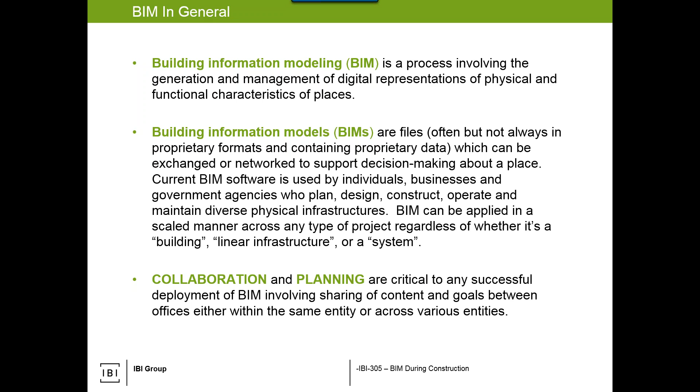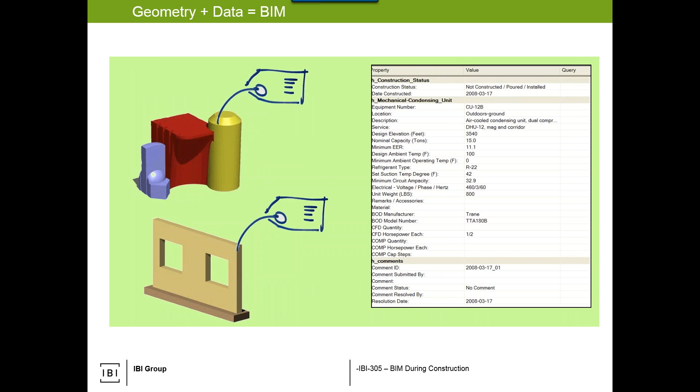BIM, as I said, is geometry plus data. An asset plus something about it gives you BIM, and that something could be robust and it could be simple, depending on what the purpose is for BIM.

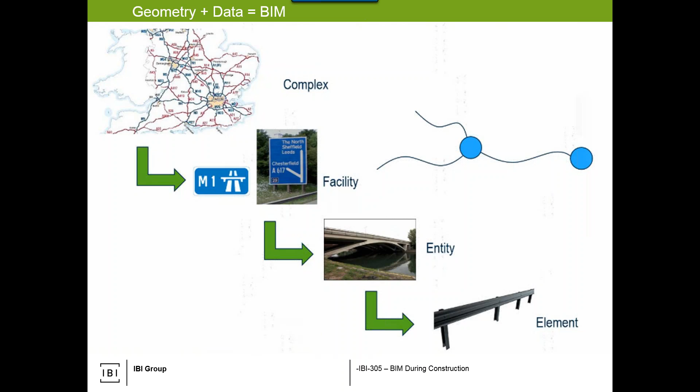BIM is about information, the I part of BIM. So you have an asset that's modeled in the virtual model; its identifier, shown here as an example of an equipment ID placed on the model, can tie it back to other sources of information — a schematic, a spec, an operations manual, a computerized operational screen. All of that ties to the very same singular asset, so it's connectivity of information.

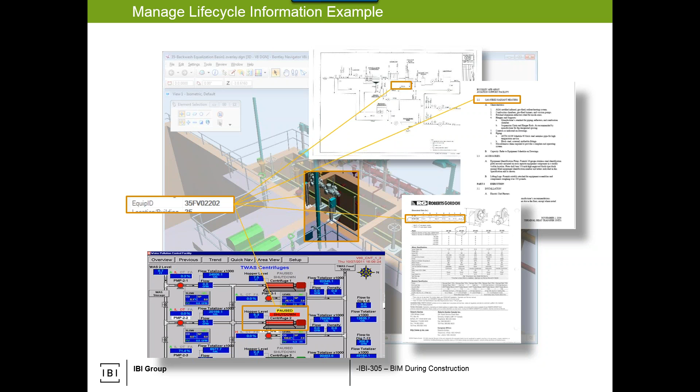Imagine everything around the side there wouldn't be jammed into the BIM model, but would be referenced to and linked to in various means so that that information is consistent and accessible.

Now here's where the fun comes in. Why do we BIM? So I think it was the second session we went around this wheel here and we touched upon each of these. The orange ones I describe as the base ones. When we say IBI does BIM for the most part on all projects, that's really what we're doing. Getting our drawings and schedules, conducting reviews, and visualizing our models.

And the visualization can spawn off into our specialty visualization with our entire extended team, global team in IBI, focusing just on visualization, rendering, and artistry. The grayish ones are your typical, when you go to BIM sessions, your clash detection, your estimating, etc. And the green ones are more advanced.

Now in the world of the contractor though, those where I've placed the star, that's where their focus is. So they're going to work in collaboration with a designer. So they're going to receive models, hopefully, of some nature, or they're going to receive PDFs and then model from their perspectives in order to achieve some or all of those BIM uses.

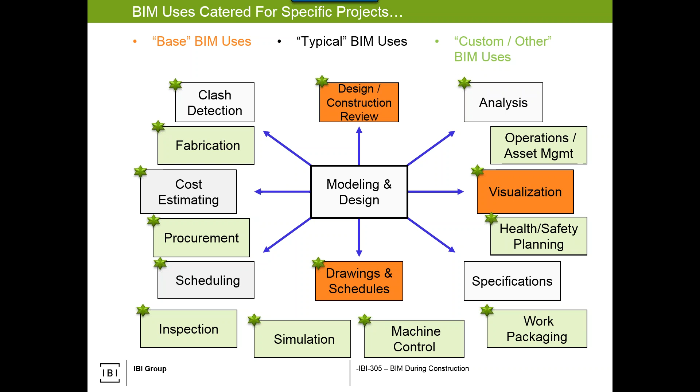And then in addition, they'll also be designing items, analyzing items, again conducting reviews, and doing health and safety planning for their sites. And we'll go through some of the stuff that gets designed in the contractor's realm as well. But before we go any further, I think I brought this slide up in the first session. BIM execution planning is very critical.

Two sessions from now, we're focusing on the project BIM lead, so that will be a point of accountability to ensure that the BIM portion of a project is scoped, scheduled, and budgeted. But that triangle at the bottom there is so inherently critical to understand that every entity, every division within an entity must have a scope, a predefined scope of why they're doing what they're doing, and it has to work in alignment with the schedule and the cost and the resources, etc. If any one of those vertices break, the triangle falls apart.

Quality is this element in the middle, and that's where the BIM portion is supposed to come in and infuse and enrich the project. But it all works together. I'm showing this because you need a plan. You've got to understand the BIM goals and which uses are going to be harnessed, and you have to mitigate scope creep, especially on the larger projects.

So for the 53% who answered no, they haven't worked with the contractors hand in hand. This is where on design build, P3 projects, or if you're on the design build, operate, finance, maintain, DBOFM, or any other type of arrangement, you're hand in hand with the contractor, sitting there as an architect or an engineer saying, this is how I design, and all of a sudden the scope and the requirements and the demands and the requests far outweigh, I would say, the normal path that a design project would take.

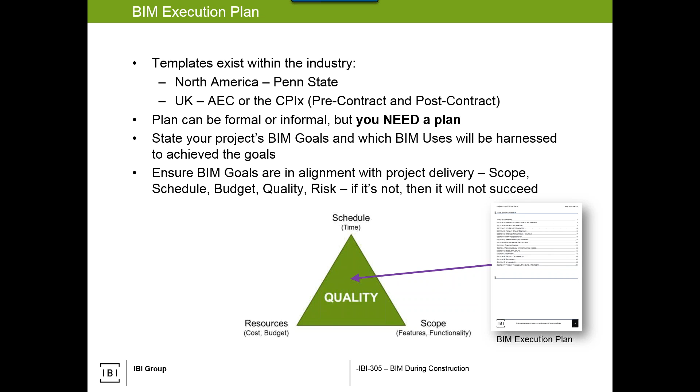So you just have to understand this. It's not to say that these relationships don't work, but there's a lot of hardship when there's scope creep throughout the entire process of design. And we'll go over a bit more of this now. So focusing on the contractor, the first thing you'll probably hear is VDC. So that's caused confusion in that, well, what does that actually mean, and why do we say that, and who is that? So VDC is Virtual Design and Construction.

You can Google it, Wiki it, there's pages on this. I like to say it's the contractor's term for BIM. So there's that perception, the BIM myth. BIM is for architects, BIM is Revit, BIM happens in design. Well, if that myth were true, we'd need a different term for what happens in construction. So that's, in my mind, how that formulated. At the end of the day, it's all BIM.

It's about information modeling. BIM is the overarching process that covers the life cycle of the project. BIM during design for architects and engineers, during construction for procurement, fabricating, and constructing, and during operations to manage the assets of importance on a project. That's where BIM plays its role.

There are many BIM terms in the world. I'll show them on the next slide in one second. But this VDC term, just equate it to, if we're teaming with a contractor, they will most likely have a virtual design and construction lead or coordinator.

And what we want them to do is give us a plan. What is the contractor's intent when it comes to BIM? And that's whether they receive BIM models from the designers, whether they're working to build the BIM models with designers, or whether they just receive nothing from the designers but intend to do BIM. We want them to outline their intent in the same manner as we would want to outline ours in the world of design.

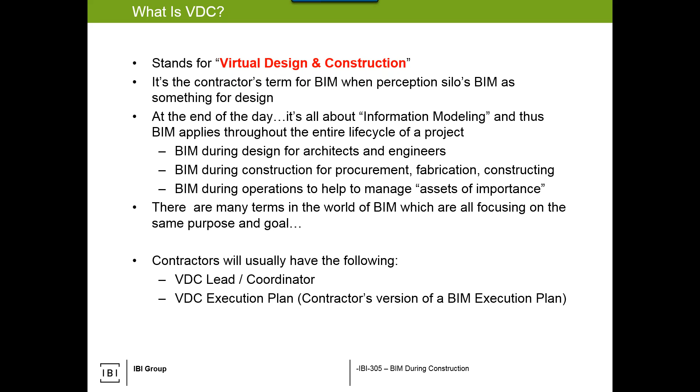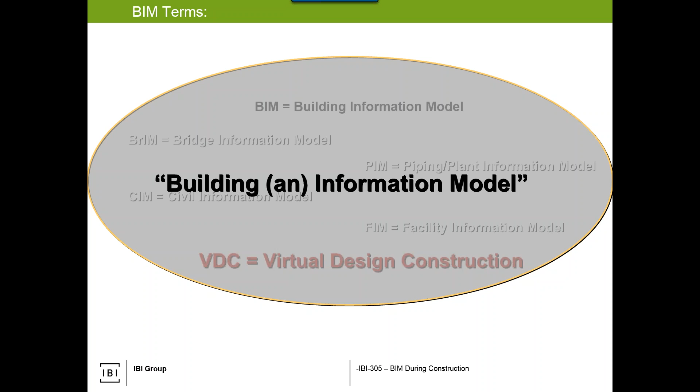Coming back to those BIM terms, these are just some of the various terms that have come around: BrIM, CIM, PIM. It's all about information modeling, and if you want to use the term branding, if you will, it's just about building an information model. And that information model is scoped, scheduled, and budgeted throughout the project's life cycle, where various parties play their role. And then it's about, as I said in that first slide, collaborating and planning. If you know what you're doing and how you're going to do it, and you're collaboratively working together, it's a perfect world and everybody will be happy.

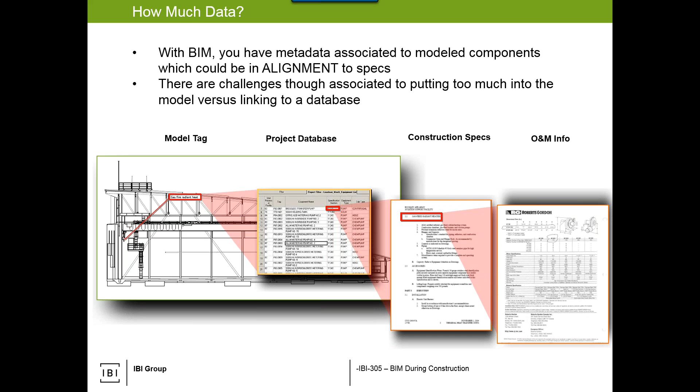So then there's the question of data, and it always comes down to the data. How much data is supposed to be there? This is a diagram I like to show. You have an entity in the model, it's got a connection to some type of a database, whether it's built into the tools or exposed elsewhere, and then linkages to other components or sources of information. So all that stream. And when you're in the world of solely design, the data requirements are design focused. But the potential when you enter into the construction realm, the sources and targets of this various types of information could be astronomical.

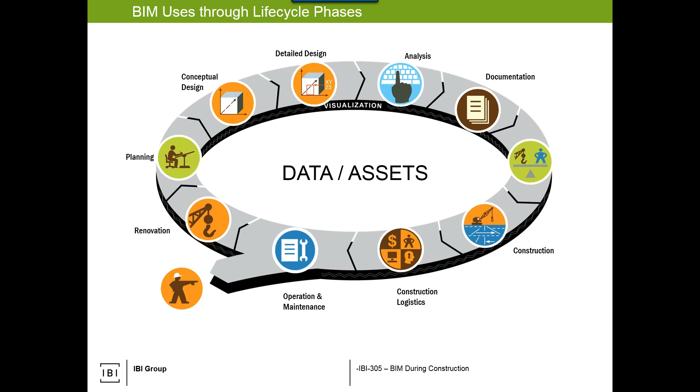So when we're working with contractors, we have to understand that it can't be adversarial. It's got to be working together for a collective good, with the confines of scope, schedule, budget, understood and appreciated, and I guess respected is the right word, so that this digital information is what the owner at the end of the day intends it to be or is hoping to receive.

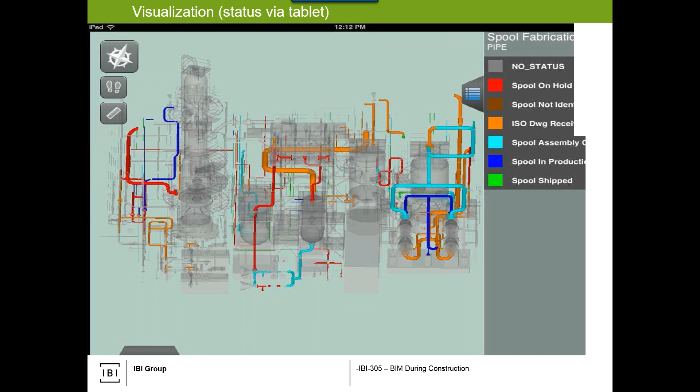A lot of visualization occurs from the contractor's perspective. So they take their tablets, they analyze the projects through their models. This is an example for just status of piping spools on a project. What's delivered, what's not, what has been received, what's in production, what's rejected, etc. They take the information on mobile tablets, they review, they query, they hide and manipulate, they can measure. All of this in conjunction with the drawings that are the form of tender. The contract is based on the drawings. The model is information that they want to use and they prefer to use, especially in the tableted environment.

So on one facet you could say, well, that has nothing to do with BIM. No, that's construction management. That's what they have to do. But the BIM model can feed into the input of this information. So how many components, how much dirt has to be moved, how much volume of concrete, therefore how many trucks, therefore how do I schedule it and how does it come to site? And all of that can be sourced or predicated with some informational content from the BIMs.

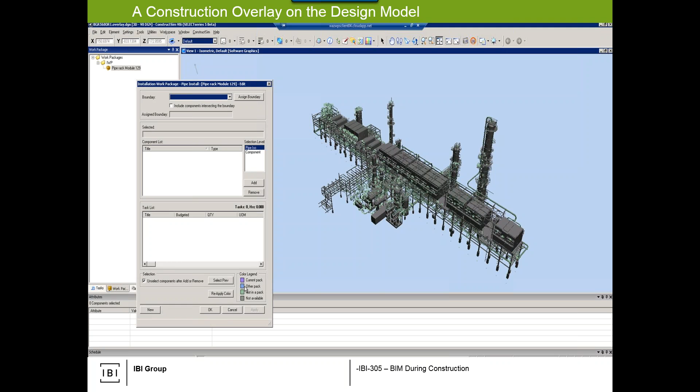This example here is called construction work packaging, and it's actually an application from Bentley that tries to achieve that. So this is something that, through discussions with BIM media or BIM forums with contractors, is how to look at the possible abilities to achieve this concept without infusing everything into one big monstrous BIM bucket that the entire life cycle is trying to touch.

And then back to the construction management, they're going to use the information based on the drawings, based on the model, based on components, based on how they sliced and diced the work packaging in order to analyze their performance relative to plan, in order to feed how they receive their money and therefore pay out their sub-trades.

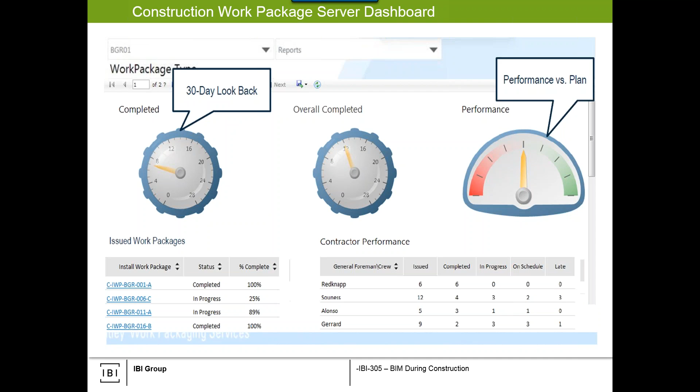Augmented reality is something that has been added to the realm of BIM/visualization to help in the field with the visualization process of what's actually going to occur. So whether it's buried infrastructure, new or existing, or whether it's how the models or the new assets will look once constructed on site, it serves a purpose from that perspective.

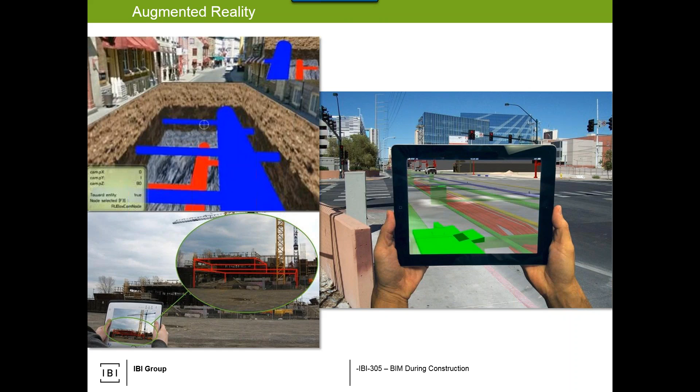There's also the management of transmittals and information, and that's a whole other realm of all of the requests, the RFIs, RFQs, the information pertaining to change orders, change directives, how to update that information, and how to ensure consistency of information and where it all is, so that come the end of the day when we're trying to deliver as-built information to a client, it actually represents what happened throughout that lifespan of the construction.

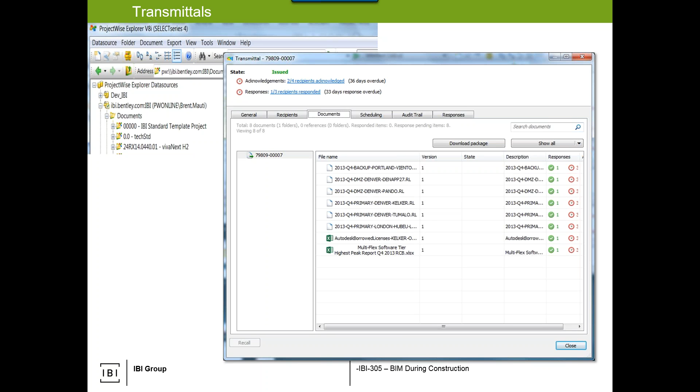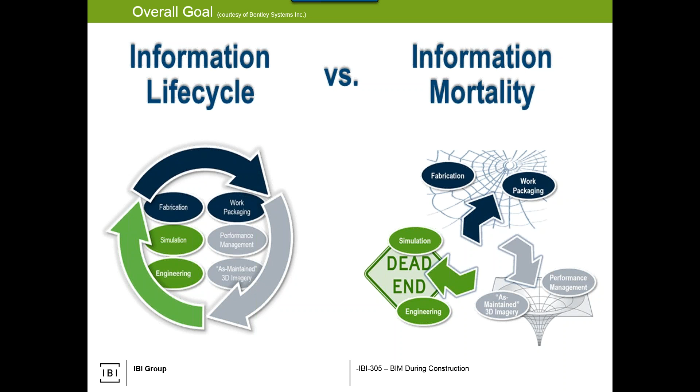And then this concept here, the blue is your construction, and the concept there is again that continual workflow like the Autodesk slide shows. You design, you simulate, you fabricate, you create, and then you manage as an owner. And you don't want to have these dead ends of information where you just can't find anything at the end of the day.

So focus specifically on construction now. Those previous slides kind of lay the premise in my mind of where the contractors will come into play and how they'll infuse. These next bunch of slides, we're looking at what are they going to do? So they're pushing us for BIM. They want our models. Give me your Revit. Give me your Civil 3D. What do they want to do with it? So I'm going to go through some of the items right now.

And this comes up a lot on our P3 projects. They're going to start by analyzing existing conditions. They're the ones who have to break the ground and understand what's down there, so that when they do that, there's no risk for life safety, they don't break something they shouldn't, there's awareness of what's going in there, and also it feeds into the design so that we know what we're designing around.

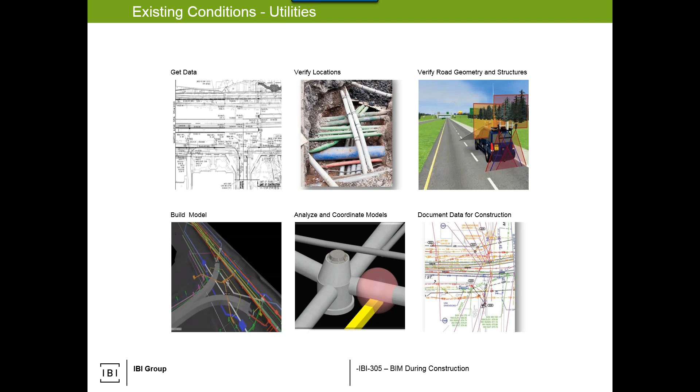Now that's, dare I say, the old way. So you want to build models of what you see. We can now use LiDAR or various other point cloud generating technologies where we look, we analyze, and you get 3D point clouds of what's seen. So it's great for what is visible, and you can even get more technologically inclined, start to do infrared sensing to try to understand what is buried, so infrared or sonar to get an undersurface 3D model, which is pretty cool.

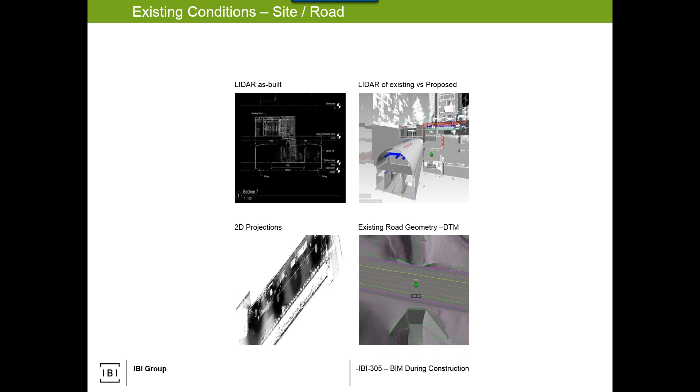The existing geometry, the DTM, a digital terrain model, would then be able to feed the existing site into a civil BIM application to allow for further development, which is pretty exciting stuff. With structures, it's a little easier to conceptualize. You get a point cloud, it sees what it sees, whether it's a bridge or a building, it can directly be brought into our building BIM software and act as a point cloud reference for subsequent design.

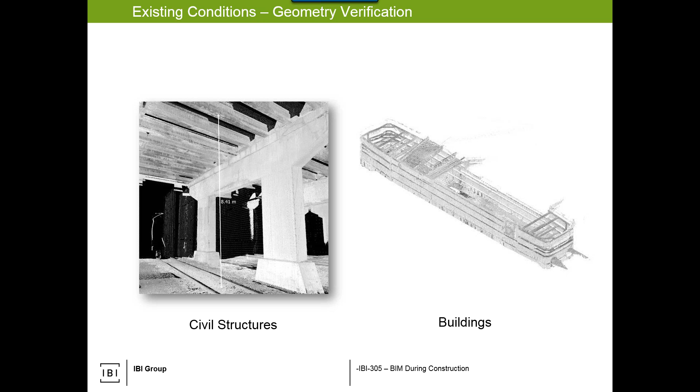It also allows for the verification of geometry relative to what's in the point cloud. So you can imagine the criticality for trying to fish conduit ducts or just insert new structure in and around the existing. So you can get that precision down to the millimeter, really, when it comes to these point clouds. The typical BIM workflow is continued. So you model, you get drawings, you annotate and document.

Now, with contractors, what they tend to do is, even though the form of tender is drawings and specs, they seek the relationship between the drawings and the source models. So they want to drive around the model, be able to cut it themselves, slice it, dice it, and work package it, but also have the relationship to the source views that would then generate the drawings, both used during design, then turned over to the contractors, and then potentially further during construction.

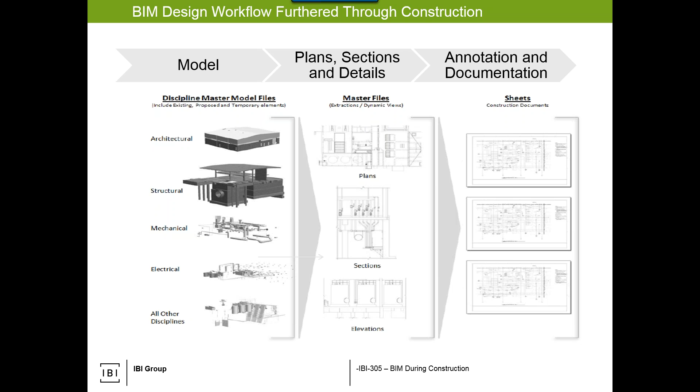So it's very critical, and when you think about how you are BIMing the right way, when you turn over these BIM models, they go through a level of interrogation for contractor use that is far above and beyond what we would do for design use. So existing conditions, design coordination, and they want to coordinate on P3s right from the very beginning, making sure things are talking to each other, understanding the relationship with utilities, the geometry of the roads, and then your typical architectural,

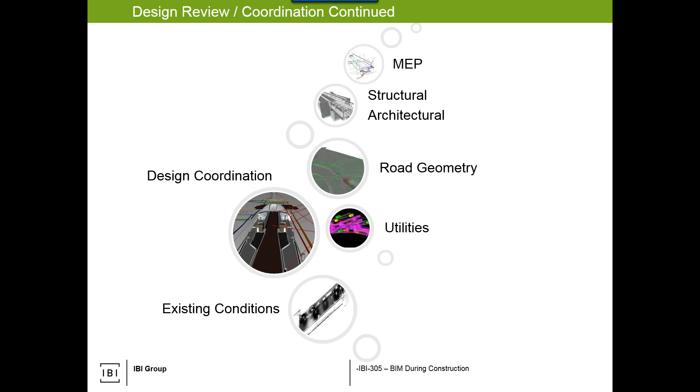structural, and MEP. And I like showing this slide because initially it's thought of, well, you're BIMing, there's a building, right? Arch, struct, MEP, they make a building, then it goes and interacts. But no, the building is not secondary, but it's second in line to coming into the site, understanding the conditions, making sure everything is ready, digging down, interacting with the existing conditions, planning and prepping all of the utilities and the connection points in order to feed up into the building. So all of that is critical, and it's from that perspective where the contractors are looking first.

Temporary works. This is probably the closest to what we do in the design world. They're actually designing components, which they then need to get permits for, which they then need to construct. And one of the biggest ones, for me, is the shoring and underpinning. That comes right at the beginning.

You walk around any site and you see they're digging a 2-3-story deep hole, and they've got to hold up everything around. That needs specific design, and usually they need to take the design models, use them as a base for reference in order to design and model all of the conditions around the building itself in order to support the site from collapsing and thereby causing collapse of the adjoining infrastructure or buildings.

Pour breaks is another one I wanted to talk about, because this has come up in my career so often, where they say, oh, you've modeled the wall. And I say, yes, I modeled the wall. And then they'll say, but no, this wall has to be poured in 100 pieces. Can you model the one component in 100 pieces? And normally the answer is no. And we need to be very clear. That would be a scope creep example, where in the perfect world, they would take my 100-meter or 300-foot long wall, and they would apply the pours onto that component.

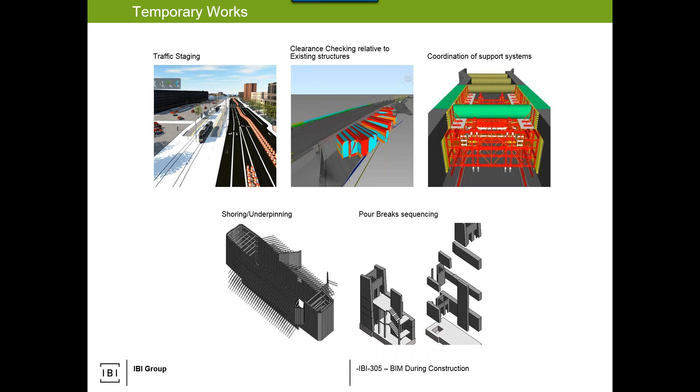They have to design how they're interrupting the existing infrastructure. So traffic staging is a great example, but you've got vehicular traffic, transit. You may be interrupting underground passageways, pedestrian sidewalks, and they've got to manage and design how they're going to fix and adapt and then refinish after the fact.

They review from a constructability perspective, and they want to do this as early on as possible. So they want to understand what's happening during design so they can figure out how to work in the constraints of the site, because usually the sites are somewhat constrained, how to get materials in and out. So where do they stage materials? Where do they put the trailers? Then how do they get the cranes in? Once you start building, how do you get the crane out? And all questions like that. They want to pose them, understand them.

To do that, they kind of need to be aware of what the built form looks like. How does it interact? Are there buildings with underground tunnels? Are there major underground utility lines on a treatment plant, connecting filters, connecting various treatment buildings? Is it a transit system, going from building to building through a constrained corridor? They've got to understand all of this so they can plan the site, plan the assembly sequence, so what components will go up first relative to a schedule, and plan the excavation.

If there's material to excavate, where does it go? Can it be repurposed on site? Can it go to another one of their sites? Does it have to be disposed? Do they have to plan for that and cost it?

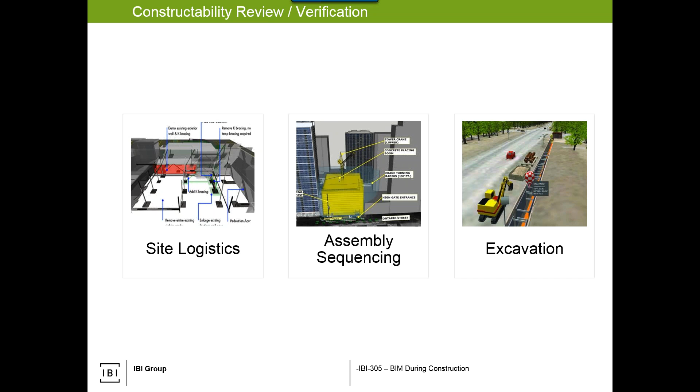4D, this is probably the biggest BIM use that the contractors will harness. The biggest. Now let's go with that. So, they will have a construction schedule, and they want to bridge the 3D model with their schedule to equal 4D simulation. It's the most industry standard, quote, D term. So 3D is length, width, height. The fourth dimension is time.

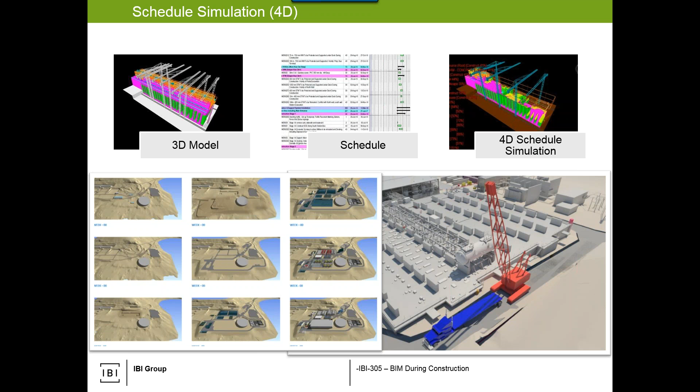They run their simulations like shown in the bottom left there, and this is showing at a macro site level how the site will be populated over time. They could do it at the building level. They could do it at the material level. So it could be, how's the concrete going to be poured over time? How's the steel going to be erected over time? They can get as finite as required, focusing on trades, focusing on materials, or focusing on the model as a whole.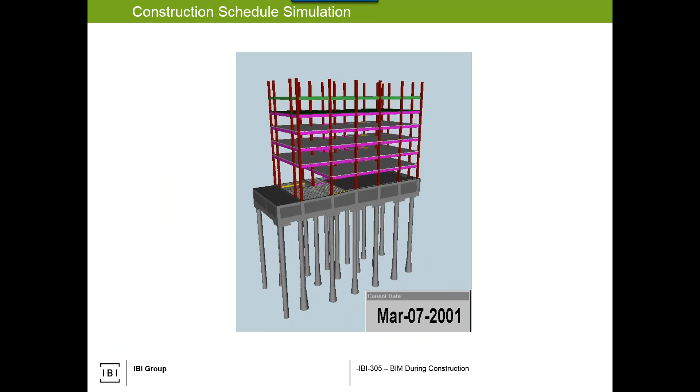This is an old video I've had for a long time, as you can see by the date. But because it's a webinar, I just took some snaps of it. So very simple, showing the foundation, going up to the superstructure, level by level, how it will be built. It's quite rudimentary, but that's the concept. So to facilitate that, they need a model that can be animated against.

And whenever I present this video, I'll say, just imagine if I modeled those red columns from ground floor straight up to the top as one component. Then you can't really simulate it from the BIM model. And there's always that dialogue. So, I would say best practice, you want to model as it should be constructed based on our knowledge as design practitioners. So I know that there's never going to be a 10, 15-story column, so I'm going to model that column as it should be modeled.

But if I modeled it as one component, my drawings would still probably look okay. My plans, elevations, and sections, my visualization would probably look okay. And in design review, it would probably look fine. So you've got to think relative to those BIM uses.

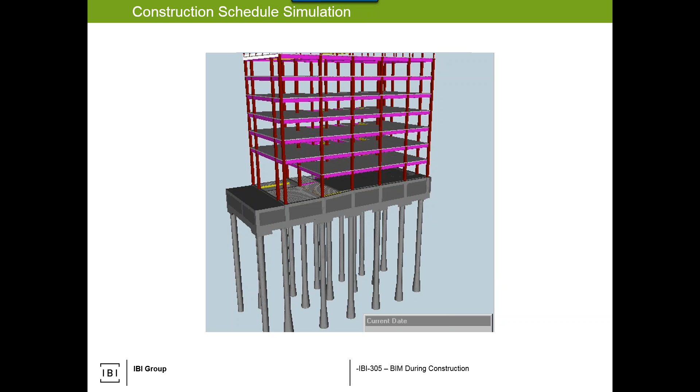For the sole sake of my work, I'd probably be okay. But knowing that somebody may want to take my model and do more with it, would it hurt me to model that column, one column per floor versus one element for the entire floor? So we ask those questions, and usually it's okay. It's not too much additional effort, and once you do it once, you can copy up and away you go. So they're all questions worth asking.

The other major BIM use is the quantities. They want to know how much material there is in that model. Now this is so heavily dependent on good data in the BIM models. This is probably the biggest point of friction where you get, hey, I can't simulate against your model, or

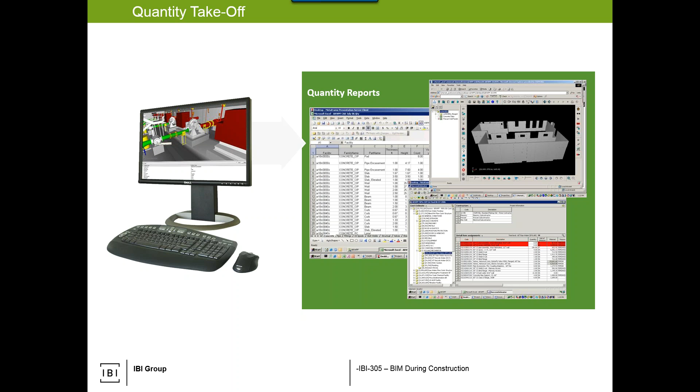hey, I took quantities of your walls and your walls aren't showing up right. Well, that back and forth dialogue, is it scope creep? Do my walls have to show up right for the contractor's quantity? Is it enough to just say, here's the amount of walls I have, you delineate materiality, you delineate how it is. So it's an interesting dialogue, which is why we stress BIM execution planning. And oftentimes, execution planning doesn't happen early enough. So we're not contractually bound to say, I will model, I must delineate material because the contractor's going to take quantities. I'm not going to take quantities, but my components have to have materiality. And if that's spelled out in the contract with the BIM execution plan, then there really is no question. We'll just do it. It's when it's not, and we try to be as efficient as possible, and then the contractors try to harness our items.

An example here, just our quantity takeoff, that's what QTO is. I believe that's becoming an industry standard acronym. So they take the model, they get a sum of the components, and they can report on it, understand it, feed it into their cost estimate, and also feed it into timelines.

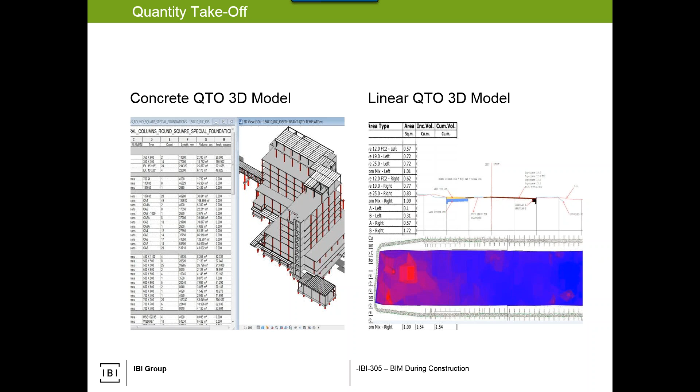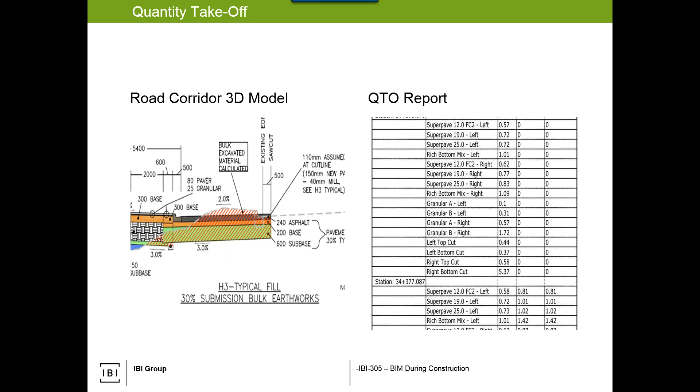Same with the linear infrastructure. They take quantity takeoffs of your piping, your surface alignments, your cut and fill calcs, etc. They can take that information from civil models and analyze it accordingly. They can take elements of a road corridor, so they understand based on the length of road and the cross section of the road, how much quantity of each component of the road there is along the overall alignment, and then report on it accordingly. Very powerful tools, very powerful abilities to be able to achieve this.

An example just of some quantity reports that I've done in previous projects, you click the button. That's really all it is, and that's all it should be. This is where it takes a while, I want to say, a comfort level for the information that comes out. So here I press a button, I get a list of concrete types - is it a slab, is it a stair, is it a straight wall, is it a curved wall, etc. Sub-volumes and an overall volume of concrete. If I know that this model is a good model, I can say, yep, there's definitely 13,351 cubic yards of concrete.

If I know that it's a bad one - in the past I've been burned on a project where there was a 3-foot diameter pipe that was encased in concrete. Well, the concrete modeler forgot to cut the hole for the 3-foot diameter pipe, spanning across the entire length of a facility. That was a lot more concrete in the estimate than there needed to be. So things like that happen.

Now, you can imagine the level of coordination required to get something robust in that, if we had to cut out all of the embeds, cut out all of the penetrations for ducts, for piping, for major conduits, or for a large collection of small conduits. Say it's a 50 millimeter conduit, but I have 15 of them running through the floor. That's going to be quite the cutout in the floor, and that'll have an impact on my concrete quantities, for example.

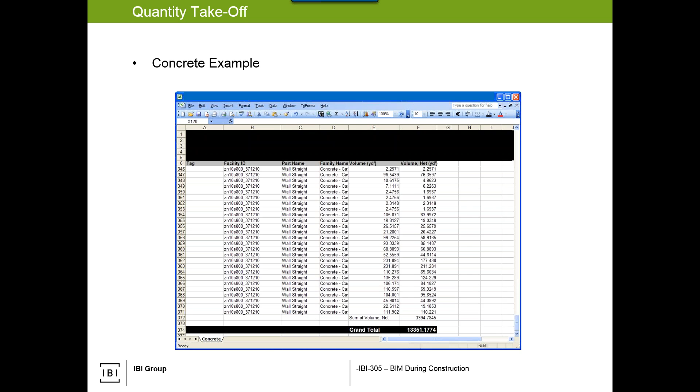Same with steel. I can analyze the model, look at all of the steel quantities, look at types of beam, and you can see the beam sections in there. It gives me my steel volume, my pounds of steel, decking, pipe supports, etc., and it'll give me an overall volume or weight of steel - information that can be used for initial takeoffs as well as for in-depth analysis relative to the schedules.

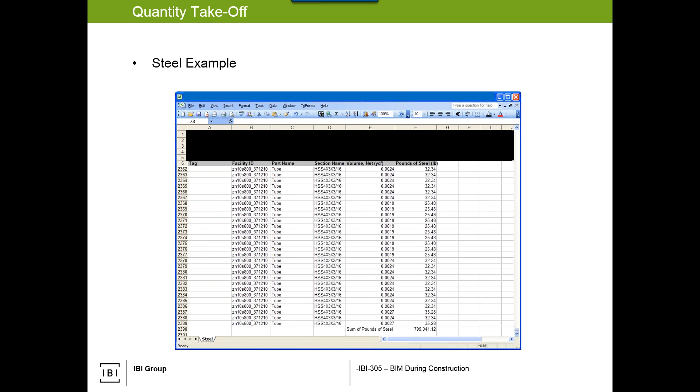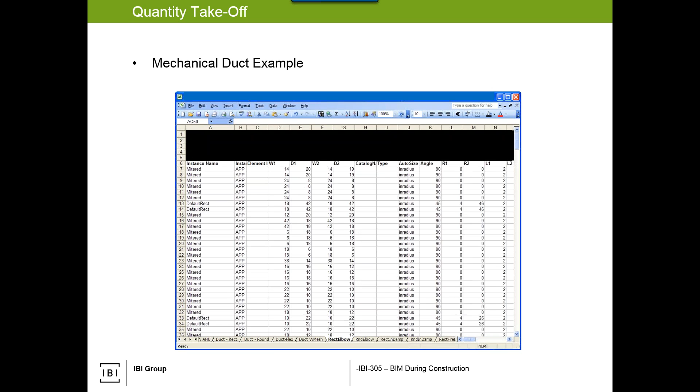Same with mechanical ductwork. I can analyze what type of mechanical equipment I have, how much length of duct I have, and the width. So this is an Imperial project, but 18-inch by 42-inch duct, length 172 feet, and away we go. So all of this can be pulled out of the models, but it's all dependent on it being modeled correctly, obviously.

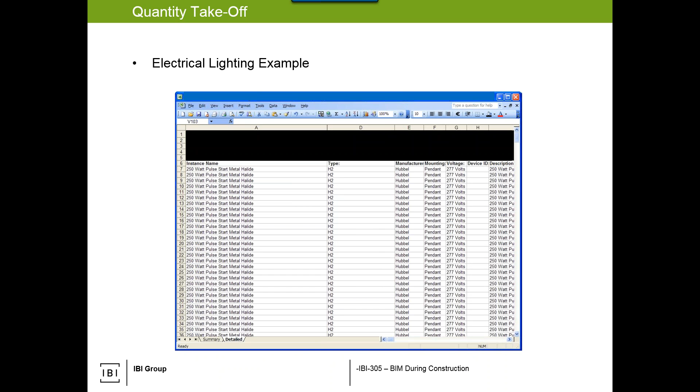That's always the question. Again, different analyzing light types. And then the last one here, you know, you can quantify anything.

I remember this project, people said, are we really going to model the telephone jacks? But at the end of the day, it wasn't anything complicated. It was a very thin rectilinear form that was placed in the model, and we called it telephone jack, placed where it was supposed to be placed. So visually, we were able to do visual design review. If there was a fixed component or equipment put in front of a telephone jack impeding its use, we were able to see it, but we were also able to quantify it. So the contractor loves getting information like that when it's required, when it's able to be given.

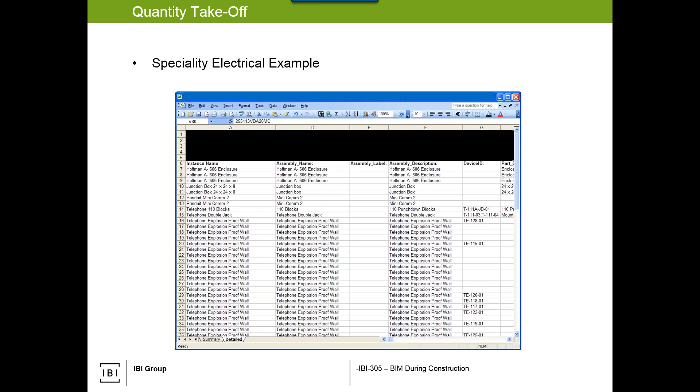Trade coordination. This is another aspect, and a heavy one from a contractor's perspective. They want to take the design models and compare them against fabrication models, for example. The steel fabricator is the best example. They'll go in and actually take a Revit model, pull it into a tool like Tekla, add connection details, add true sizes, add anything else that otherwise wouldn't have been represented on the design side, fabricate the components, build the shop drawings, take professional liability by stamping, and deliver to site for steel erection.

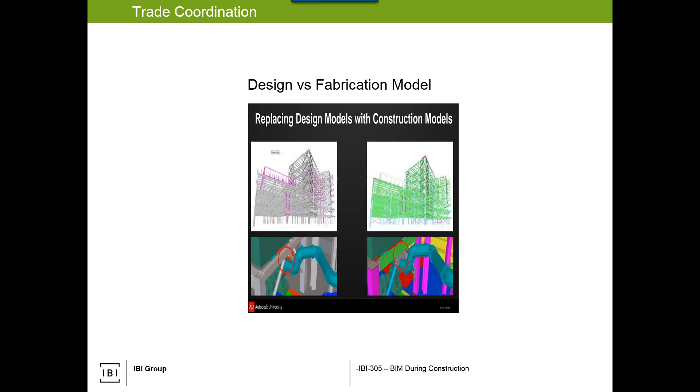And the contractors will want to compare the intent versus the fabrication, analyze any potential conflicts, because now if something's been fabricated, the geometry may have shifted, and therefore there may be complications or interferences with other components that are not steel. So they're able to look and say, do I have a design versus fabrication clash? Something's changed—is it a hard clash? Is it a soft clash? Has something moved into a reserved space for barrier-free accessibility, for operation of a door swing, for operation of a mechanical valve? All good questions, and then they report against that accordingly.

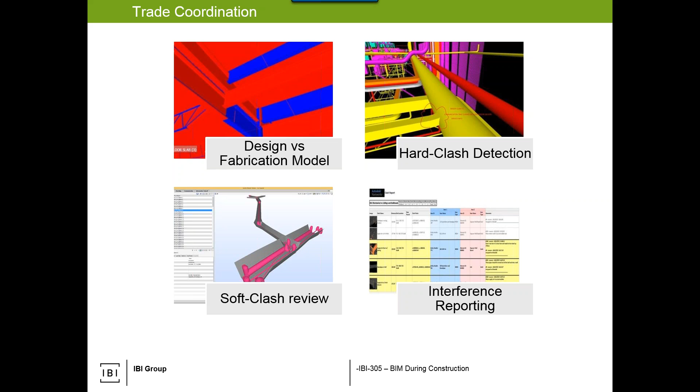Clashes are very heavily done on the contractor side. On P3 projects, when we turn over digital information, they're actually running these clash reports right from the very beginning. So it's very interesting when we're at 30 to 60% design, being told, hey, your stair is clashing with the columns. And you say, yeah, but it's being designed. So there are those dialogues that are fun, but it's very important to understand from the contractor's perspective, you have hard clashes—pipe interfering with a curtain wall, as shown here, or a pipe with a beam, that's a big clash, or a duct hitting a beam, all those good ones.

But the soft clashes are ones that people really don't realize—I have a piece of equipment, there's a requirement to have a 4-foot clearance around it, either for safety requirements or for just operational requirements of the equipment itself. And those reserved spaces are actually finding their way into BIM applications, where not only do we now model components, but we model the spaces that cannot be touched. So then they are flagged as interferences if there are hard components within the soft spaces.

And then we've got schedule simulation clashes. So as they attach a schedule to a model and process the simulation, they'll identify that as components are moving into and out of the space, we could have a clash.

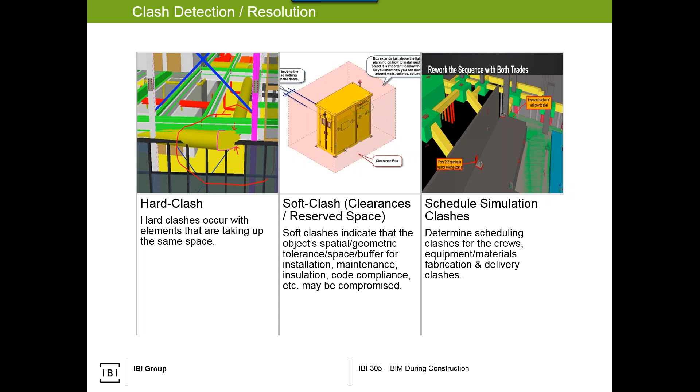So the walls went up, the roof went on, everything was good. They were able to close it up for the winter, remove the louver when the generator was delivered, insert the generator into the building through the louver, and then replace the louver. The removable louver gave them the ability to access and get the generator in and out if needed. That was all discovered through a schedule simulation based on how they had to close the building relative to weather, as opposed to relative to the delivery schedule of the components. That was an interesting case that resonates in my mind going forward.

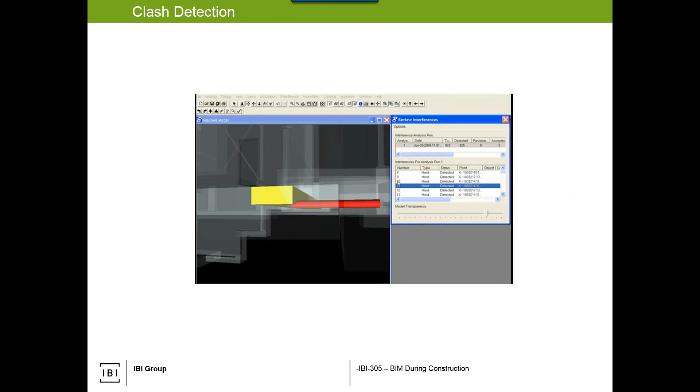Another video that I would show, but essentially you're able to swing through your models, identify your clashes, see what component is clashing with what, report against them, assign those clashes, understand them, see what the items are, and deliver them to a target audience in order to resolve.

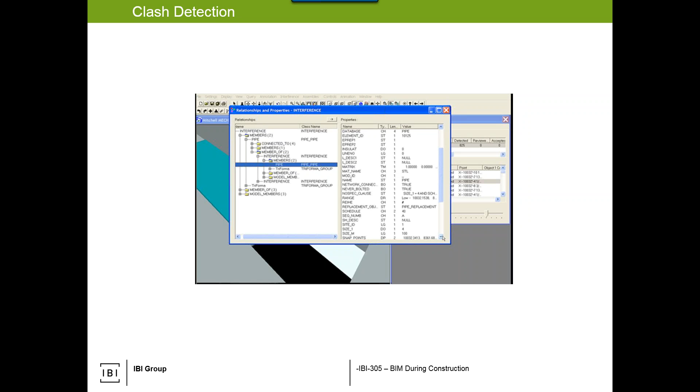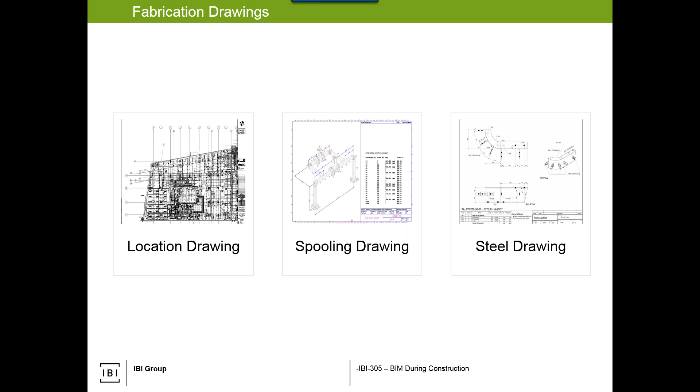The steel components will then be sent off to the fabricator, who will be focused solely on that element. That element will be fabricated, delivered to the site, assembled relative to the other components, and then located relative to the conglomeration of all the assets. So that concept is fragmenting BIM into its component elements, because that's what the contractor has to do. It has to understand what's in that building, or what's in that linear infrastructure as a whole, break it down to the asset level, and then build it back up in the built environment.

The other thing they can do is use BIM for machine control and site verification. They can take digital terrain models and analyze existing built geometry, whether it's the site or the BIM models. Floor flatness is one of my favorite examples. They can take the design intent with respect to floor slopes and analyze whether or not they achieved that after the pour. If you have high spots or low spots, they can then declare whether it's acceptable and fit for purpose, or work on a remediation.

Verifying geometry in the field relative to geometry in the models could be used with augmented reality, putting the BIM model in front of what's being built using tablet devices, just to solve complex issues. You go to site, you look at what's in the drawings and what's happening on site, and something doesn't jive. How do you fix it and what do you do?

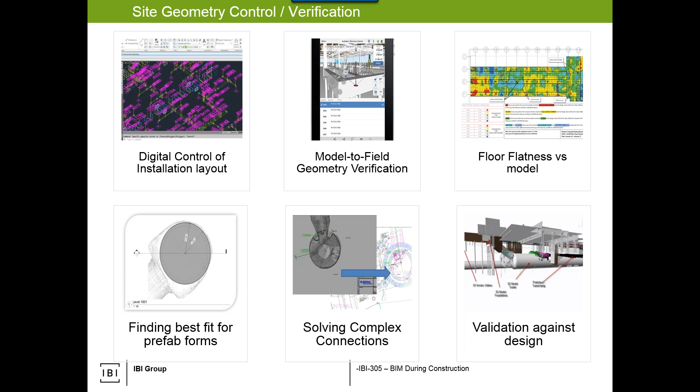An example from my previous work: they couldn't pour the concrete in the forms because the rebar was spaced too close together, so the aggregate couldn't fall through. The aggregate was getting stuck on the rebar, and only the liquid was falling down into the form. That was a very interesting one, and it called for a bit of a concrete redesign for the actual mixture, using a different strength concrete and different sized aggregate to fit within the already installed rebar. It was an interesting complexity that, in the design world, we may or may not see those types of items.

Just counting the stuff that's been installed. So you've ordered and procured a bunch of components. They get scattered across the site upon delivery, and then you want to verify that everything's been installed. Everything that the contractors paid for, they want to understand where the stuff is supposed to be in the design and where it is in the physical form. So they could use just field count verification visually. They could use barcode technology if they choose to go that route.

The excavation volume scanning, I've seen this happen taking a civil BIM model. We've got a digital terrain model, you've got your curvatures, your slopes, etc., everything modeled, and you have the various stratifications of the site modeled and identified as well. And depending on your cut fill requirements, they can then scan the site to see if the site is representing what is in the DTM, and then they can do comparative analysis to ensure that what they're doing on site is occurring relative to the design.

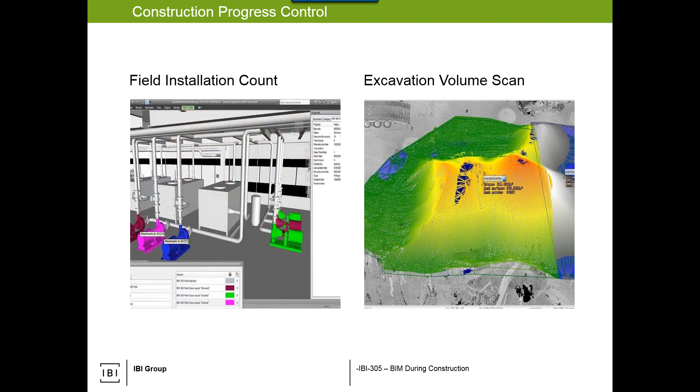And I don't know if anybody's seen on LinkedIn, there's a pretty slick video where they're just showing in a sandbox, you dig through the sand, and an augmented reality projection of the BIM model is showing what you're digging into relative to water levels and underground infrastructure. So it's kind of cool where the technology is going. Now, that was in a sandbox. One day it'll be on an entire site.

So then schedule control. So previously we talked about that 4D schedule. They'll have that, but now they want to verify that against their actual schedule. And that picture of the post-it, that's what they do. They'll have a schedule in the trailer, and they want to analyze, are they meeting what they were projecting? And if not, then does that have to be adjusted?

Again, the BIM model is part of the backbone of this, and in the context of all these examples, just keep thinking back. If you turn over the model to them and the model's not good, and you haven't signed any waivers for use at your own risk, what does that mean to us? Or in the P3 world, as we're continually sending them information, they're doing this relative to design information that may only be at 30 or 60% complete. So look, the footings might be at IFC, but the superstructure nowhere near, for example.

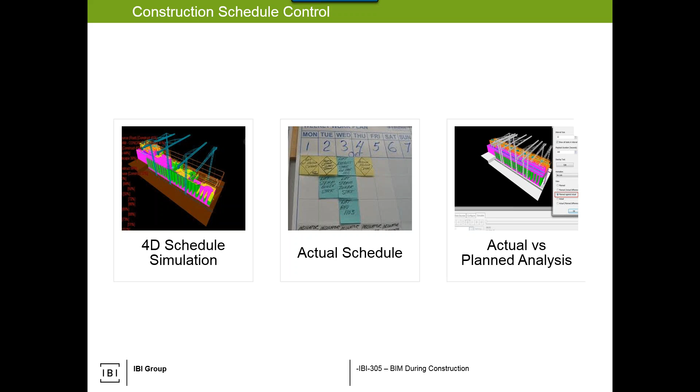They can do deficiency lists. So there's the concept of punch lists, so they can go around site, identify items that are as designed and as required for installation. They can identify what isn't, tag that in the BIM model, feed that back to one common database, allow for visualization of items that have to be replaced or where the comments are, stuff that's back in the detailing phase, etc., all relative to a visual locational model, which is using the BIM model as a base.

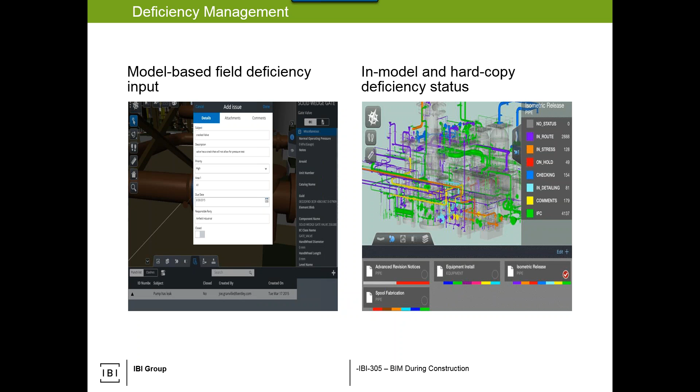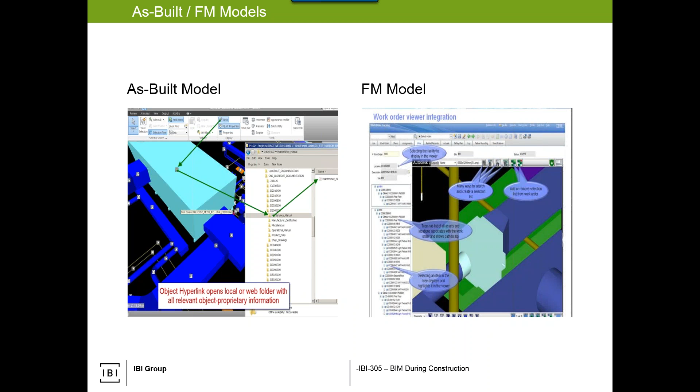And we're getting to the, I want to say, a little more rarer of instances where, in the FM world, the owners know there's a BIM and they want it. There's a lot of effort to make sure that through that design and construction life cycle, they're able to receive something that is actually in a usable state. When working on these FM models, or models to be harnessed during as-built and FM, it's so critical to understand that there's information once you hit tender.

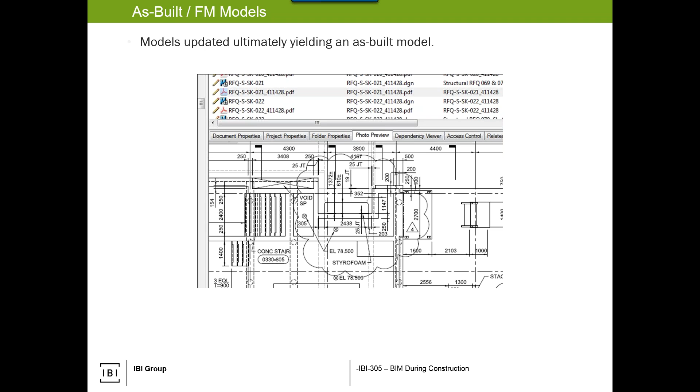And this example, so let's say it's a design bid build. Stuff happens, you make an RFQ and things change. And this was just a project I worked on previously. The support of this element was redesigned. You sketch it out, the contractor can go and bid it, it gets entered into a change order, and the contractor proceeds. But if this model isn't updated, and therefore the drawings associated aren't updated, that sketch, if it's in a document management system, maybe you'll find it. If not, it'll probably get lost throughout the 2 to 5 to 10 years of construction, and then what? The model would never be updated.

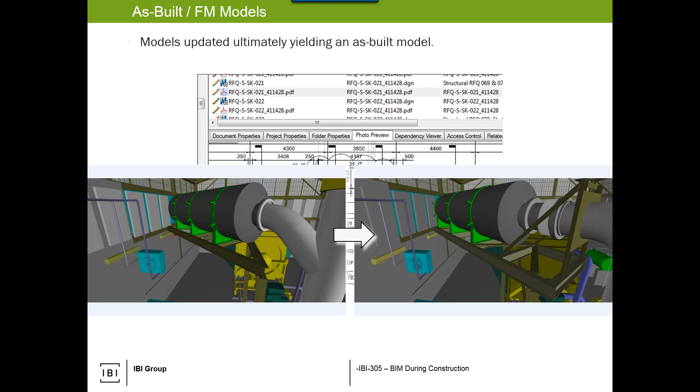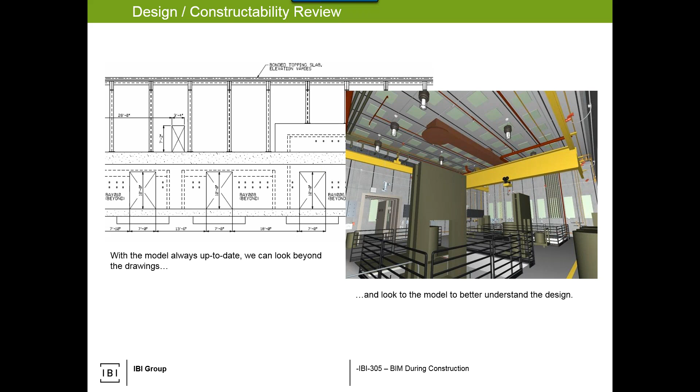So this design constructability review, this is the last one, and this is very heavy, right? So as you're going through the process, it's taking drawings and understanding what the intent is, how they're meant to be looked, how the components come into place, and how to actually interpret what's being shown on the drawings. And there's various ways. That was just using still imagery.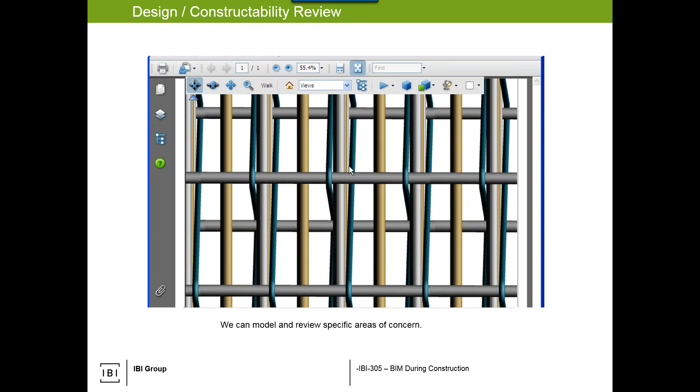This is a 3D PDF on a previous project where we had to model the rebar itself, and it was to show and give an understanding of how the design could possibly work. So they took a component, they did a quick model of it to bring an understanding of it in an area of concern to a level of development that we would never model to. Even the contractor wouldn't. But in a design build project, there may be instances where we have to show some type of detail. Just reviewing the model as it's being developed in a live environment.

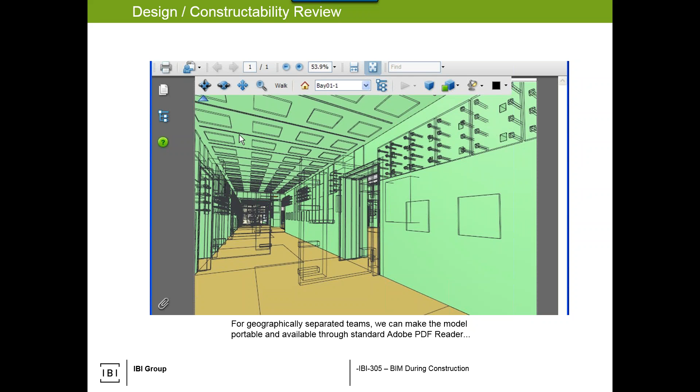This is a MicroStation example, but it's the same concept, whether you're using a Bentley product, a Revit product, ArchiCAD. Take your model, slice it up, understand how components are meant to be harnessed, utilized, interacted with. 3D PDFs, take pieces of a model or a space, show the layout of it, drive through the spaces, understand, get design reviews to occur during the construction phase. So if I have to make a change to a component, understand what I'm changing and why I'm changing it. If we have to get stakeholders to understand, or clients, all of these tools are at our disposal.

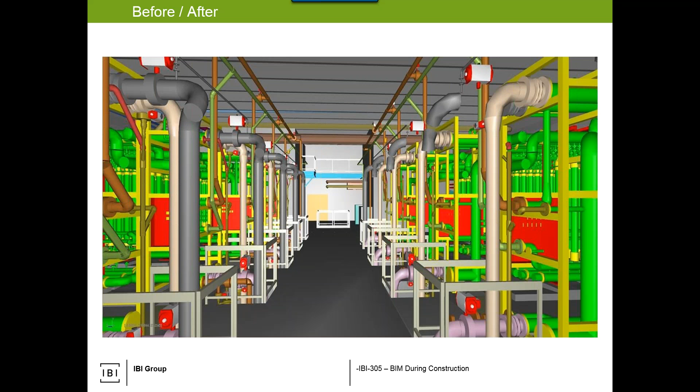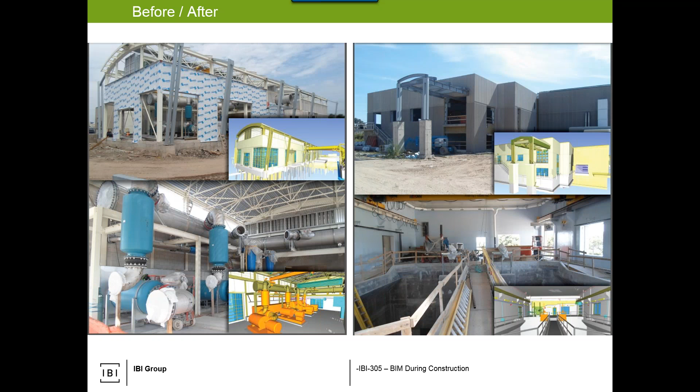So the ultimate is your model is becoming reality. And when BIM started a decade or so ago, maybe more, a decade and a half, it was just getting to the BIM stage. But these are examples. So this first example is from my previous work where the model actually is what's shown in reality. And we're seeing more and more instances of this where you can take those BIM models, whether you're the designer or the contractor, and actually start to see those in reality. So this is our Ajax GO station.

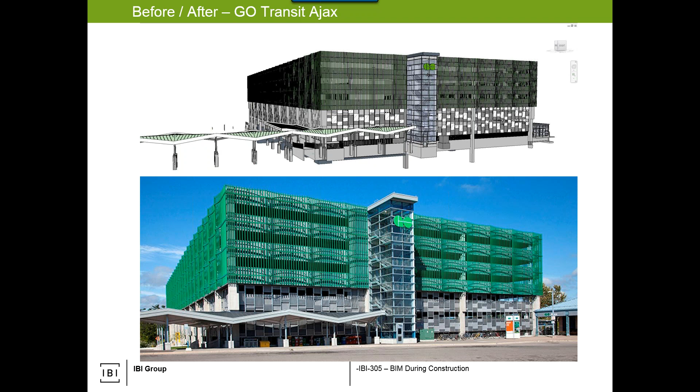And when you see this and you're able to look back and forth between what's in that BIM model and what's actually being built, it's quite impressive to see that these are coming to fruition. And when I look at this one, sometimes I forget which one is the BIM model, and it's the top left there is the BIM model, the bottom right is the actual building. But sometimes it's hard to tell because they're just so accurate and representative.

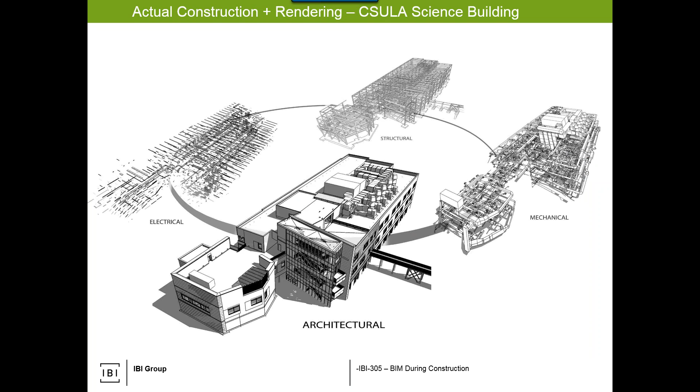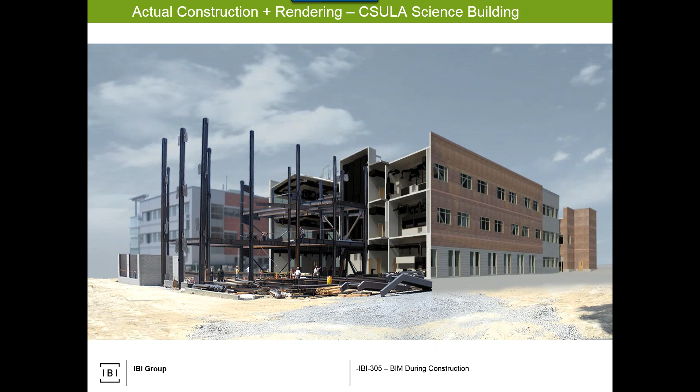You can also bridge actual construction and rendering side by side, and this one was done from our US West region. This is pretty slick as well. So as the sites start to be constructed, they're feeding into the BIM model, and you can just fuse it together to say, hey, here's what started, here's how it's going to look, and here it is in context, and you can start to bring fusion to the real and the designed in forms like this.